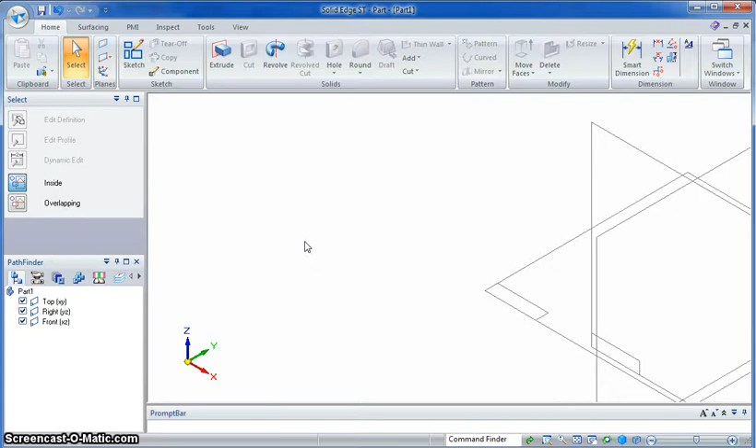Okay, this is CAD 1.5, the gauge block. With the gauge block we've got a front, top and side view, we've got a base plate, we've got a hole through the middle, we've got a bit of a backwards C shape sitting on top of the base plate. So we've got a part file.

We're going to start with the extrude tool again, as always. We're going to start with the base plate. Seems like a good place to start. You can start anywhere if you really liked.

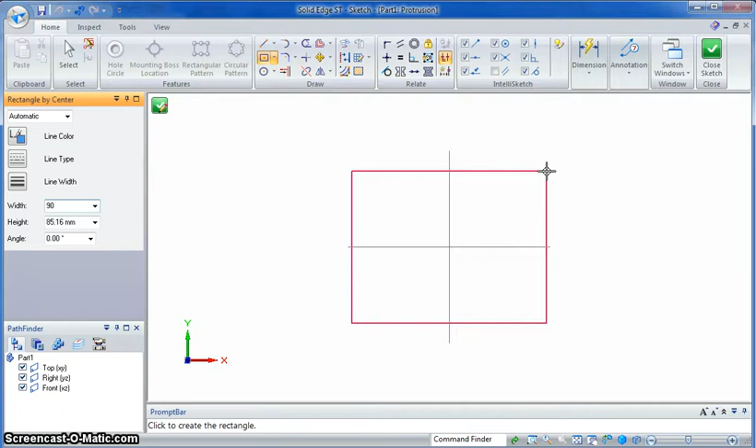I'm going to start with the rectangle tool. I'm going to do an overall size for that base plate, which is 90 by 52, 90 wide and 52. And we'll give it a 0 angle.

Okay, we've also got a bit of a chamfer going on. It's a 45-degree chamfer on each corner. If you look at the top view, you can see there's a chamfer. It looks like it steps back 10. You have to be very careful to check which dimension relates to which part of it. Okay, but here we've got chamfer underneath fillet. A chamfer is just a 45-degree cut off a corner.

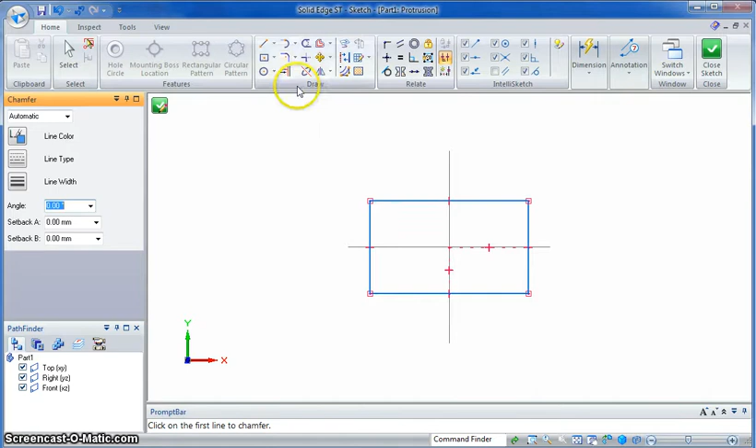Right, we're going to choose that corner, and you can see here I can move it freely, but I need a particular setback. So I'm going to go for a setback of 10. It looks like it is 10. It's letting me do a different angle. I just want 10, 10. Okay, I want a 45-degree. There it is, snapping to that point.

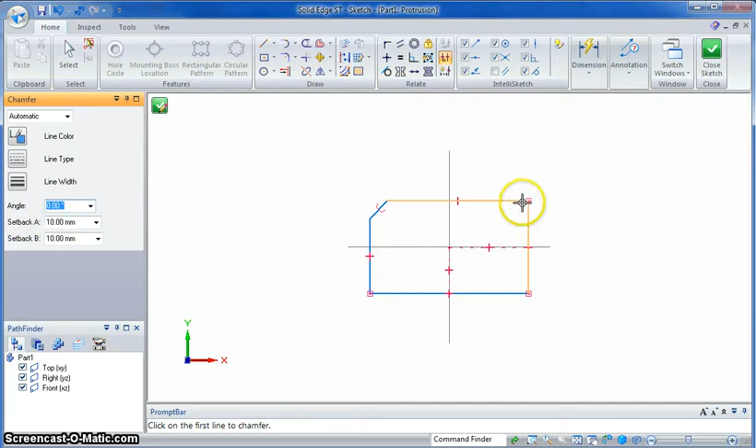I don't want it to be different, the setback, so I'm just going to go for 45-degree chamfer, just to cut off a corner. I'm just going to do all 4 corners. So there's our base plate.

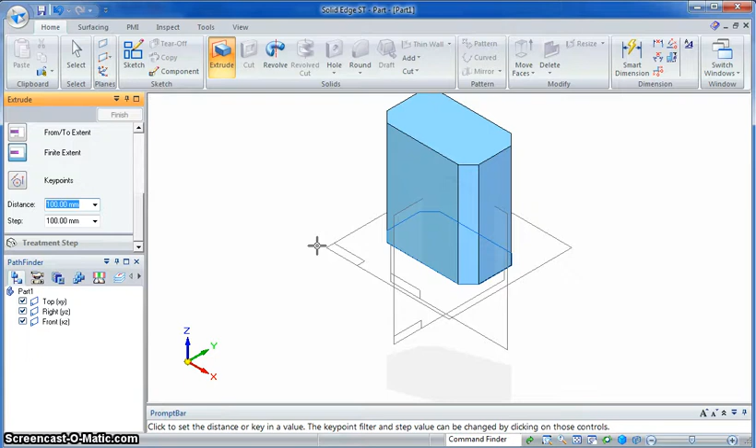I could do that cut out through the middle, but I'll probably do that a bit later. So I'm going to close that sketch. Now I've got down here, I've got the distance it wants to extrude. For some reason it's set to 100. I need the base to only be 12, so type in 12, enter. You can see that it just snaps to that height. Click and then right click to finish.

Okay, we're going to do the piece that sits in the top, that sort of backward C shape. So we're going to do another extrude, on the top face this time. I'm going to use the line tool this time, give me a bit more control over where things sit.

Now it comes in 6 from the edge, so we can come in 6 from any edge, and 22 from this end, so I might just come up 22, enter, from there. And I'm going to come in 6 from this end, 6, enter, there. So you can see that that's the point at which it lines up.

I could do this probably an easier way just to make it a bit clearer for you, just delete those. But if I had that point there, you can see if I hover on those and then pull it out, I can click that point and I'm going to come up off that bottom edge the 22, enter, place that there. It's a bit of a construction line to know where I start. And then I'm going to come across 6.

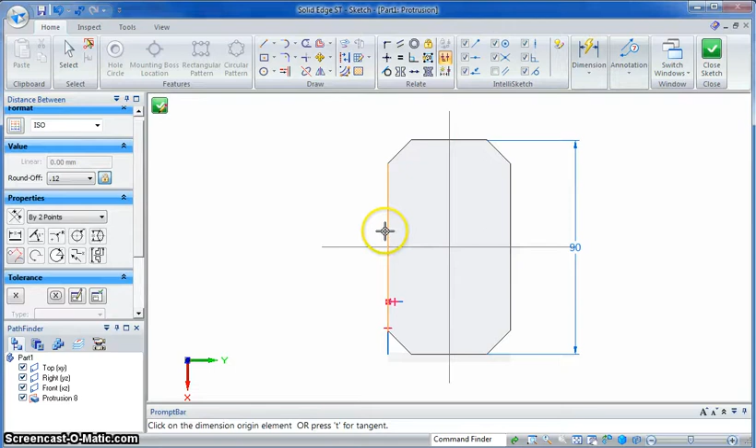Okay, so dimensions, overall dimensions. We might do a distance between dimensions, so a distance between that and that, 90, and a distance between that side and that side is 52.

And then we've got in here, we're going to be drawing the next piece, which is our C shape or whatever. It's going to be sort of probably a U shape, the way I've got it orientated. So I'm going to do the thickness of the U, which I'll have to work out. Oh no, I can see it on the side view, it's 40, so that makes it easy. 40, enter.

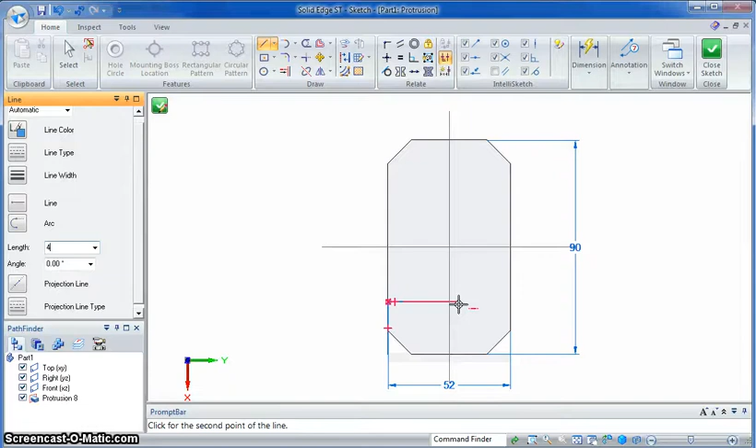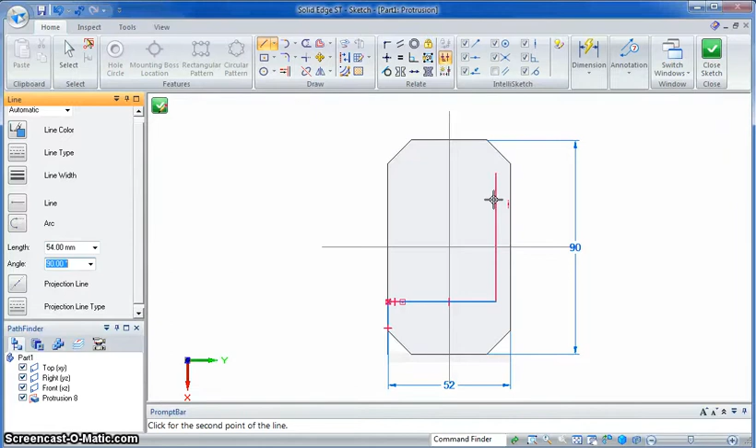I'm going to go all the way along, so it looks like full width of that, 90, take away 22, take away 14. So it doesn't actually give the full distance of this U shape. So 90, 80, 70. So we've got 68, 58, 54. So it's 54 up. Okay, that's about right. Yeah.

Okay, so I'll just put a dimension on that so you can see. I had to work that out, based on the dimensions, the other dimensions around the place. So now I'm going to keep using the line tool here, come off this edge.

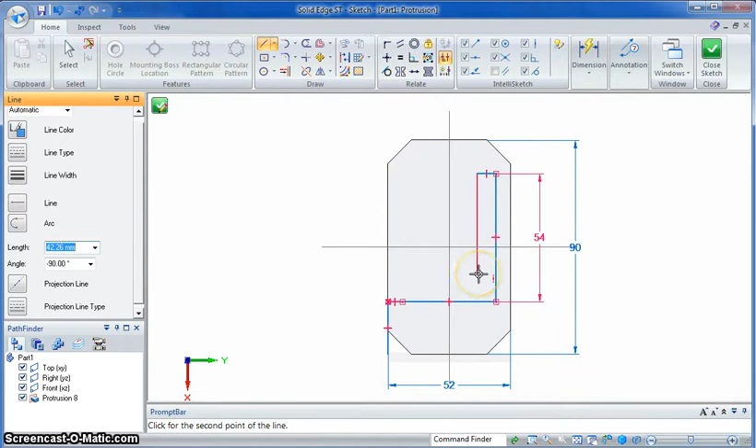It's going to be 8. Now there's more than one way to do this, so I'm just going to come down here at a distance that I can just trim off later. I'm just going to line that up, and that comes across 8 as well, into the side, come down here.

Now I guess if I want to make that particular length, I've got 54, so I could say 54, take away the thickness of 8 at the back, so I've got 46. So 46, enter, and then I'll just cross that over. Okay, so that inside one was 46.

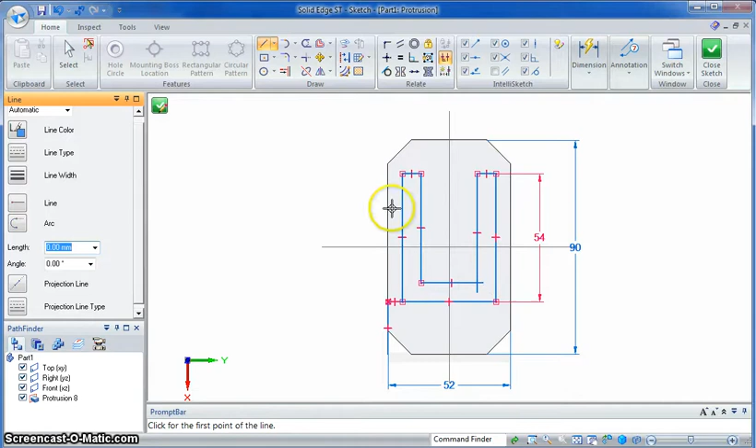There you go. Okay, I still have this hanging over here. I don't really want that. I've got a few too many lines going on, so I need to use the trim tool. Trim those up, trim, trim. I'm also going to trim up those construction lines that helped me see where I needed to start.

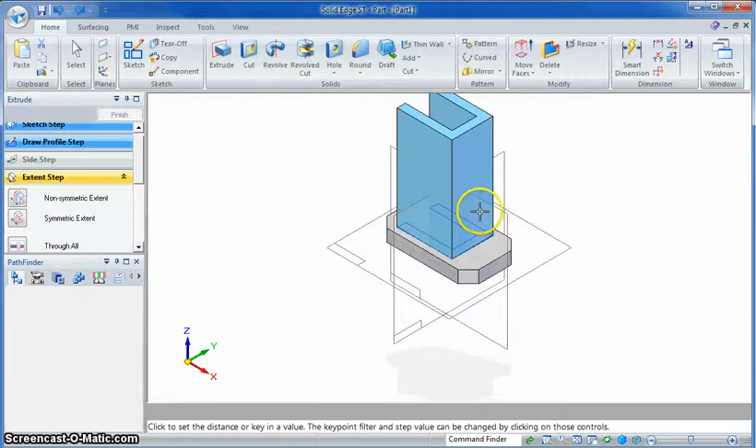So with that complete, I can hit close sketch. I'm coming up off my shape. It's snapping to 100. I didn't type in 100, it's just done that by default.

So the height of the shape is 40, take away the base plate height, which is 12, so we're looking at 28. 28, I type that in, enter. Okay, and then I right click to finish.

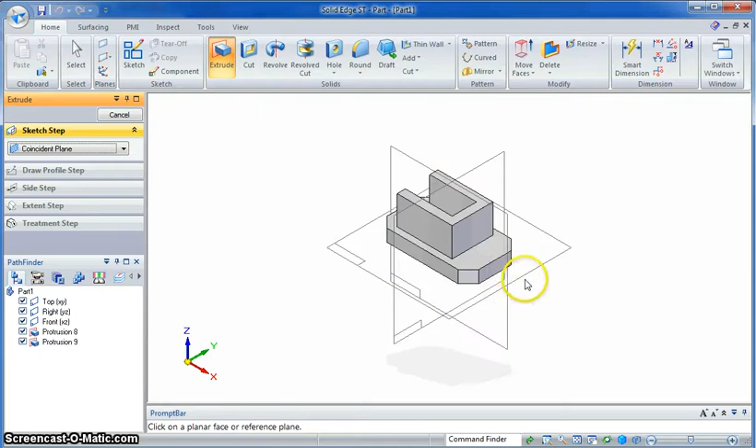Okay, I still haven't finished yet. I need a chamfer on those points, and I also need a hollow through the middle. Okay, so let's do the chamfer.

There's another way to do a chamfer. Here you've got a chamfer tool. You can do it after the fact, so we can do chamfer now. Clicking on that point, it's saying, yes, I want to accept.

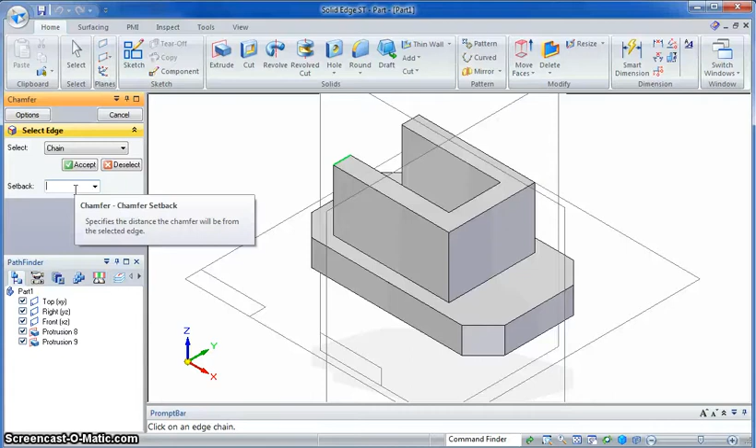I want to make a setback of, ooh, what does it say? Setback. Not really giving me a setback, so oh yeah, okay, I'm gonna have to work it out. So I've got an overall height of 40, take away 12 on the base plate and take away another 10, so that's take away 22, so I've got an 18 setback. So we'll type in 18 in the setback.

Okay, there is my setback. Make sure you hit the finish. Same with this one. Accept, finish. Okay, so we can just have a look at that. Might rotate that around so you can have a look.

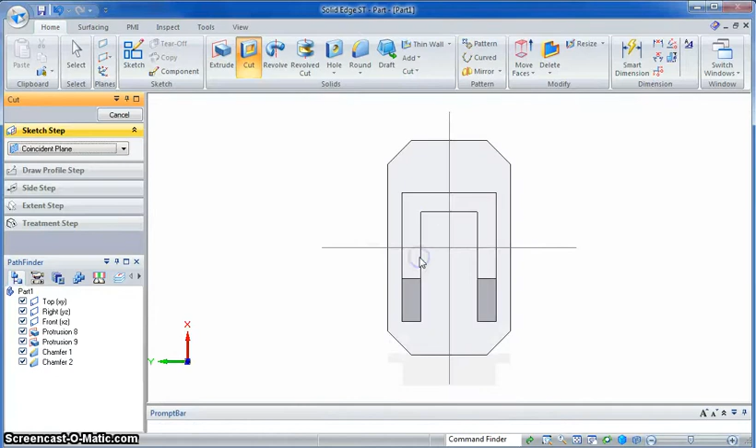There's still no hole in the middle. We need to put the hole in there in the middle. We use the cut tool on that base plate, and we're going to just draw a hole through the middle so we can cut it.

So I remember when I hover on this line, if I get to the end, you should be able to, not only should it be highlighted in orange, it should have a little stick with a ball on the end. Come to the other end of the line. I'm going to come down. It does not go down to the end, so have to be careful on that.

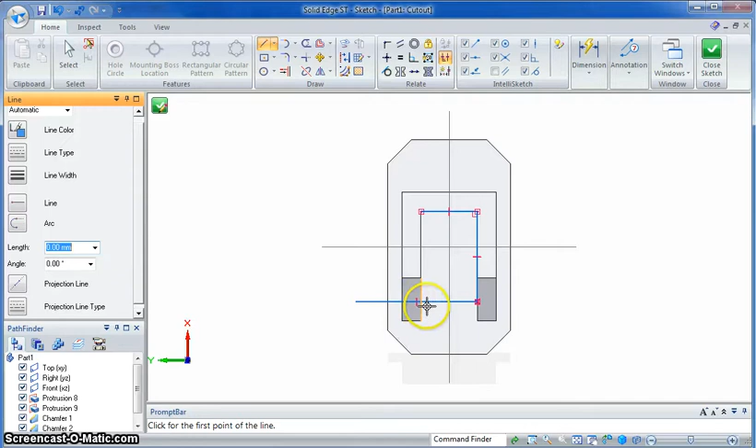It is actually 38, so it only comes to there, and we're going to come across. See, the length should be the same as what we had before. I'm just going to come over because it's sort of trying to snap to something strange in there, so I'm just going to extend it, making sure it's just perfectly horizontal, and then I'm going to come down off this point and just cross it over, and then I can just trim things off.

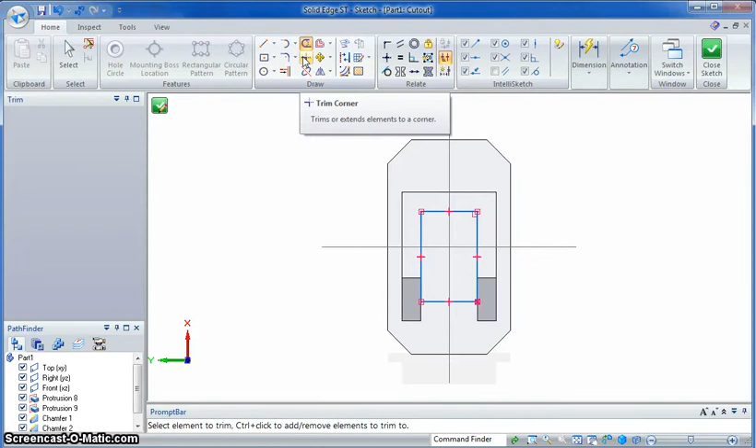Okay, now I have squares on all those corners, so it knows they're connected. If it does not have a square on any corner, you can force it to join. Those squares indicate it's joined with the trim corner tool. If you use that, it will force two lines to come to a join point.

Okay, hit close sketch. We're going to go back through the shape and make sure you hit right click to finish. So there it is. There is our final shape. Okay, you can see there, I've got a cut through the middle. That's the gauge block, CAD 1.5. Well done.